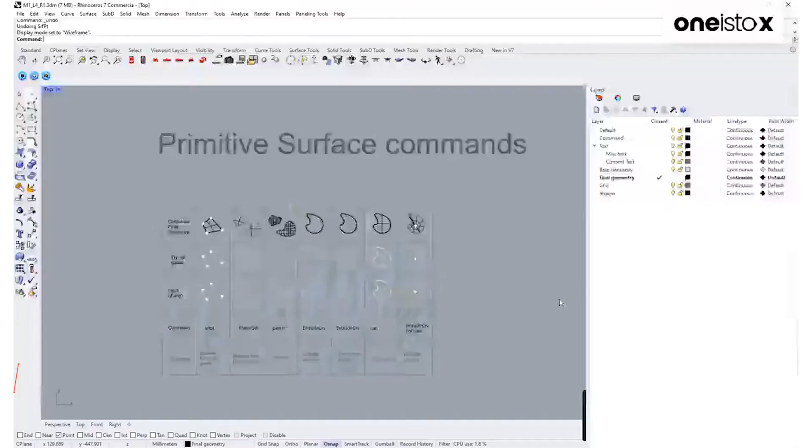Now we know how to draft 2D objects. Let's look at how we can create surfaces from them. For that, we need to go back to our resource file. In this part of section 2, we will be looking at how to create different types of surfaces in Rhino using NURBS geometry. For this, I'll switch to perspective mode like this and change my visual appearance to shaded. This way, all our geometries are now in a solid state.

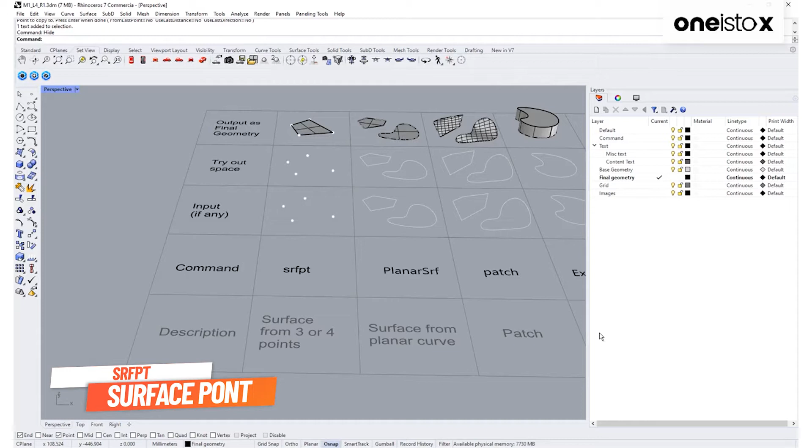There are many ways to create a surface, one of which is to create a surface using 3 or 4 points. In order to create a surface from 3 or 4 points, I'll be using a command named srfpt, that is surface point. Now, what the command is asking me for is the first corner of the surface. If I follow the process along, it's asking me to give in multiple points. Once I click on the 4th point, it automatically completes my surface and it gives me a 4-point surface.

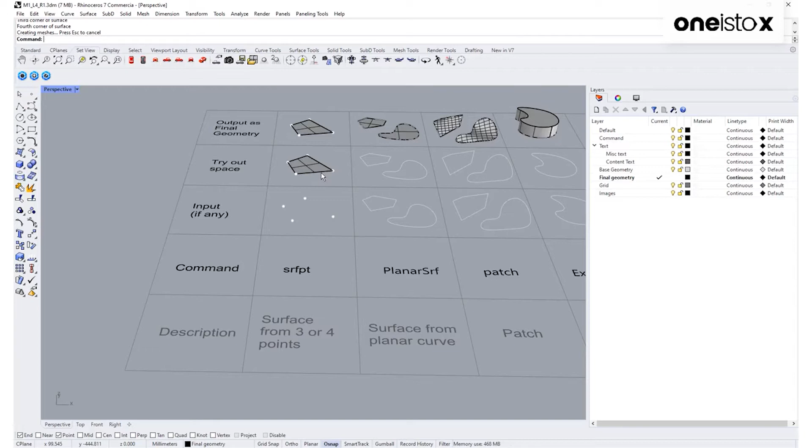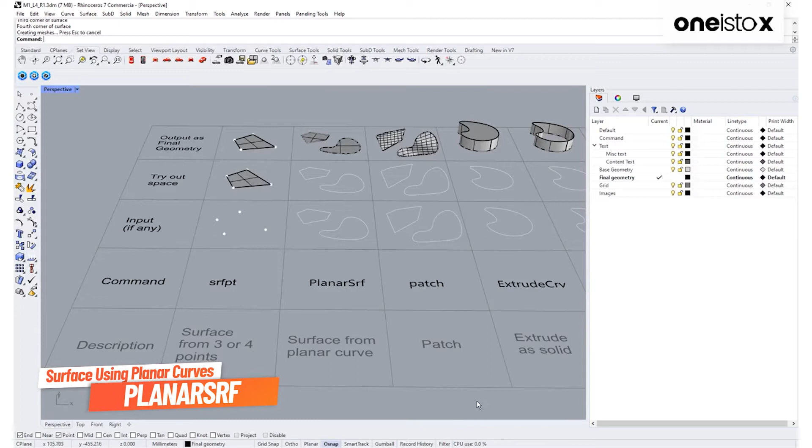Suppose we arrive at a situation when we do not know the 3 or 4 points that we require to create a surface from. But instead, we have an organic curve or a polyline. How can I create a surface without any points as an input to my command? For that, Rhino provides us with a command named planarsrf to create a surface from planar curves. I'll type in this command to see what it can do. Once I select that command, it is asking me to give in a curve as an input. I'll select the curve that I have, hit enter, and it will create a surface on that curve. Similarly, if I have a polyline as well, I can apply the same command on it.

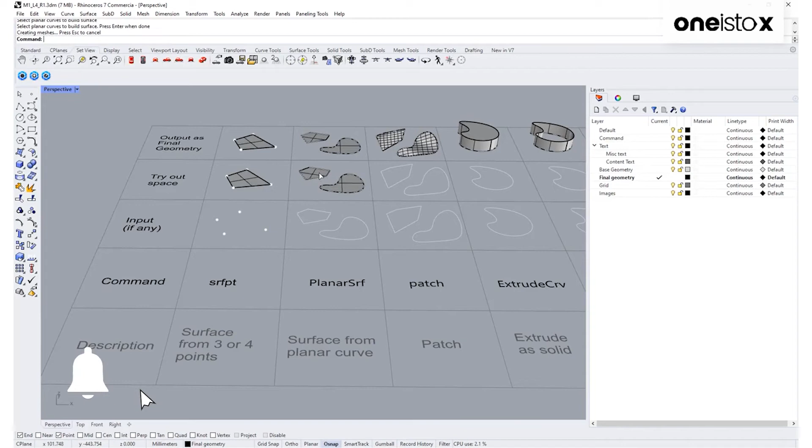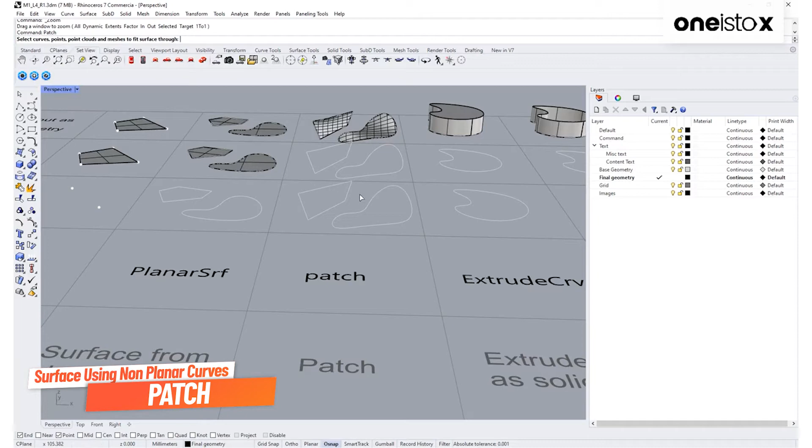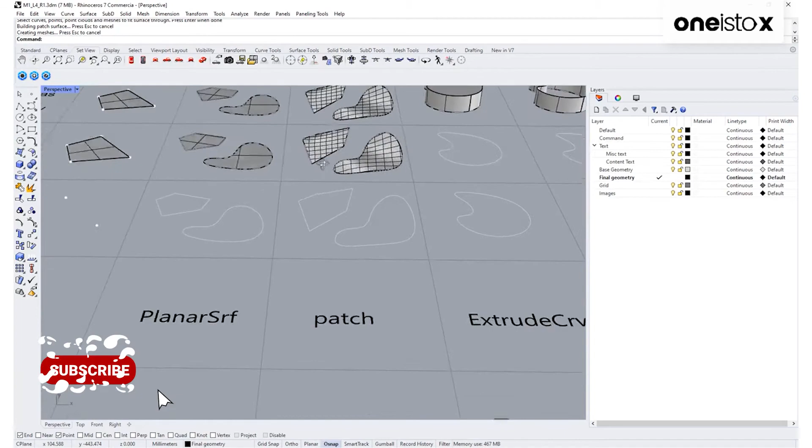Now, in some cases, we do not have a flat surface to work with, that is, our curves are not in the XY plane, and some part of a curve is in the Z direction. Something like this. How can we create a patch or a surface on it? The command that we'll be using here is patch. Let's type that in and see what it does. I'll select the curve, hit enter, press OK, and now it has created a surface on the curve which is not planar. I'll apply the same thing on the polyline which is not planar and see what it gives me as an output. As we can see, the curves are not on the XY plane, but still we have the surface that we need.

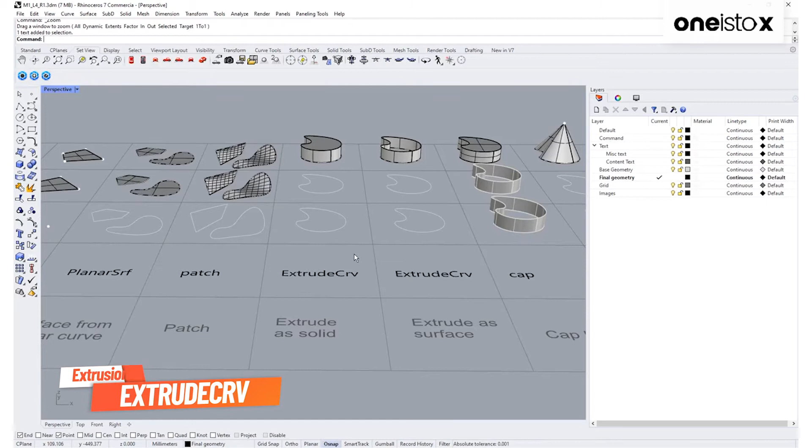Now, while working on projects, I deal with situations when I have a curve and I want to create an extrusion. For that, I'll be using a command named extrude curve, typed in as it is given in this section for you as a reference, and see what it does. I'll type extrude and within the drop down menu I can see an option ExtrudeCrv. This is the command that we'll be using here. I'll select that one. It is asking for a curve to give as an input. I'll select the curve, hit enter, and as we see on the screen, a preview of the extrusion shows.

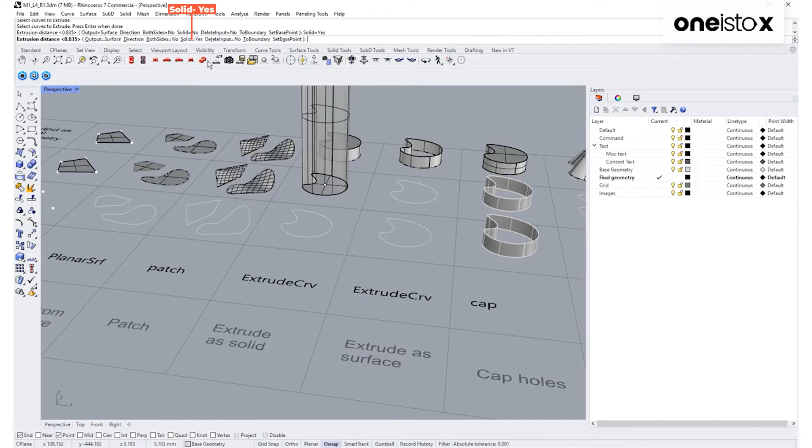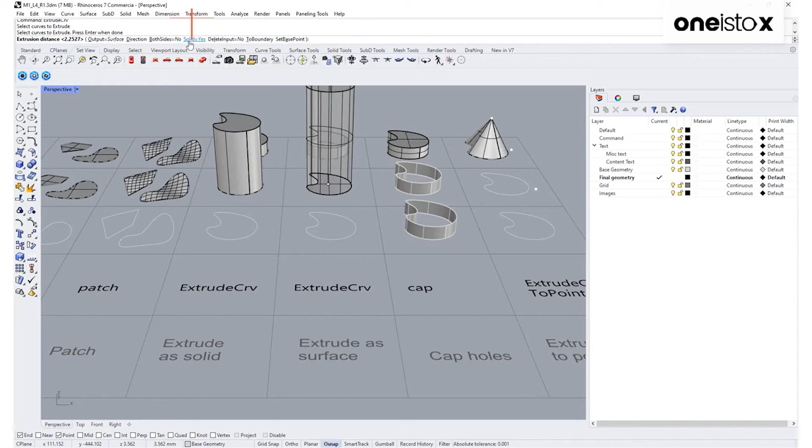Right now on my screen, Solid is set to No. I'll switch it to Yes and create an extrusion like this. Here, our extrusion is capped on all the sides and the external face. So this is a solid extrusion. But in some cases, we might deal with a situation where we need only the outer shell of our extrusion. To do that, I'll apply the same command again, give it a curve, and change Solid to No. And once I give it a height, we can see that the top and the bottom surfaces of our extrusion are not a part of our final product.

In cases where we have already created a surface but we want to cap it and close all of its open faces, we'll be using a command named cap. Hit enter, give it an input of the shell that we have, press enter, and it will close all the open faces of our solid.

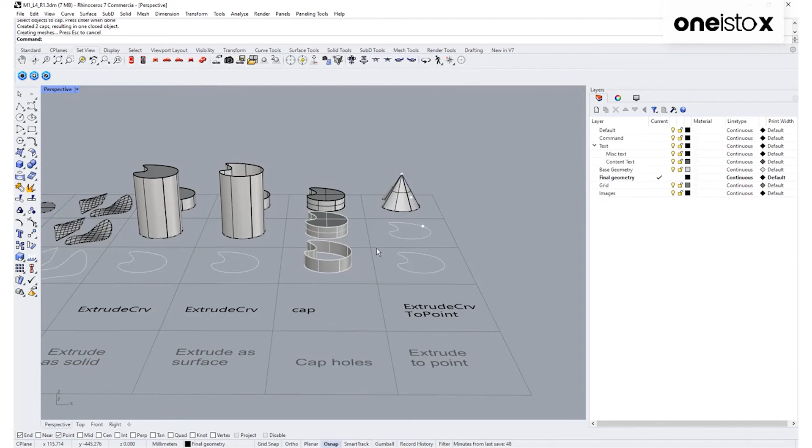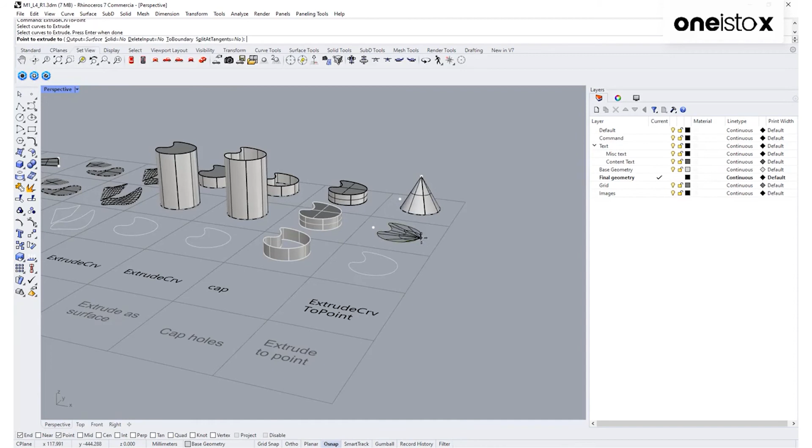There is an additional way of extrusion where we might not want to extrude a curve in a cylindrical way, but want to create it in a conical way. How can we do that? We'll be using a command named extrude curve to point; type that in to see what it does. Hit enter, select the curve, make sure that your object snap is on to point, select that point, click it, and here you go. You have your geometry which is extruded towards a point.

The commands that I just explained are commonly used. You might have come across some of them in other software like SketchUp. You can try them out before we move on to the next video.